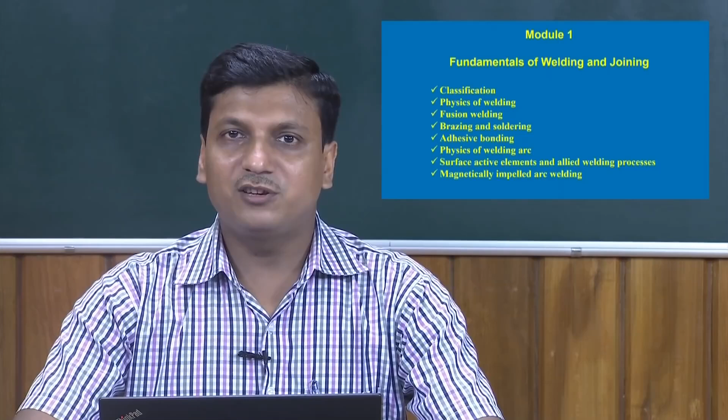Physics of welding arc, because so far much development has been done in the arc welding processes. So, we will try to get some idea about the physics involved in the formation of the arc, very specific to the welding processes. Then more advanced topics in this section, that is the influence of the surface active elements, and based on that what different welding processes have been developed, or how we can modify existing welding processes by considering the effect of the surface active elements. And finally, we will try to cover the magnetically impelled arc welding process.

So, these are the different sections of this module, and the name of this module has been given as fundamentals of welding and joining. We will try to get some idea of the basic physics involved in the welding processes, or most conventional welding processes, and the different technology of the welding processes. We will just get some broad idea about the processes.

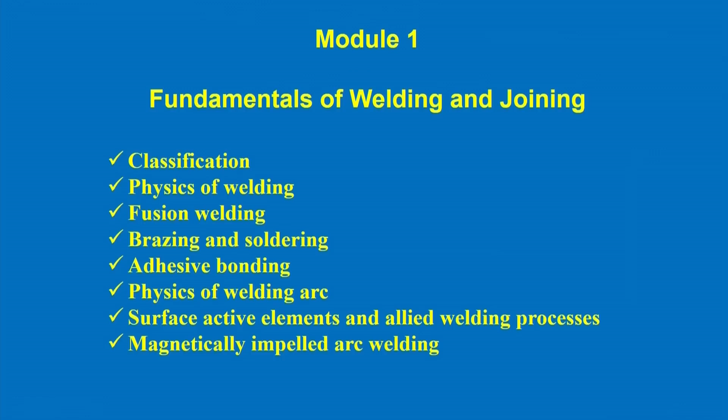If we see almost all sectors of industry, there is a need for joining of materials, which can be done either by fusing the metals or using some adhesives or some other joining techniques. If we list some of the application areas: electrification, automobile, airplane, water supply and distribution, electronics, radio and television, agricultural sector, computer, telephone, air conditioning, and of course almost all sectors. So, it is indeed very important to know about the fundamentals of the different welding processes.

Now, this technology is mostly used in the airplane or aerospace industry, highway, health technologies, spacecraft, and recently different welding processes have been developed looking into the application of high performance materials. So, it covers almost all sectors.

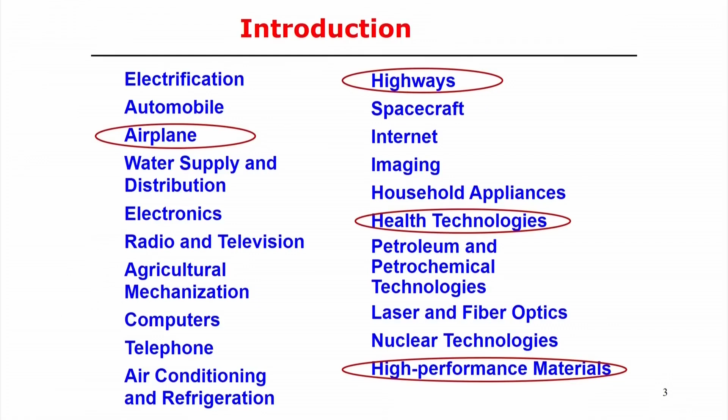So, here is the importance of the welding processes, and before going into much detail about all the welding processes, we will try to get the basic mechanism of all these processes. Probably it can be a review of the different welding processes; only their mechanisms will be the focus in this part. And now, how can we define welding and joining?

There is no precise definition of welding processes or joining processes, rather we can say that when two metals, specifically metallic materials, are joined by fusing with the application of different types of heat source, that in general is called the welding process.

Normally welding involves fusion, and joining processes may be of another kind. For example, when you use fasteners, mechanical riveting, and use the fastener to join the two components, that is also termed as a joining process, but there is no need of any kind of fusion or atom-to-atom covalence in that case. So, that can be considered as a joining process.

For example, even in adhesive bonding, if you use some glue to join two materials, that can also be called a joining process, but here the mechanism is different from the fusion processes. Where fusion is happening in welding and joining, that is specifically termed the fusion welding process. Of course, solid state welding processes can also be considered; we generally say solid state welding process, sometimes also solid state joining processes.

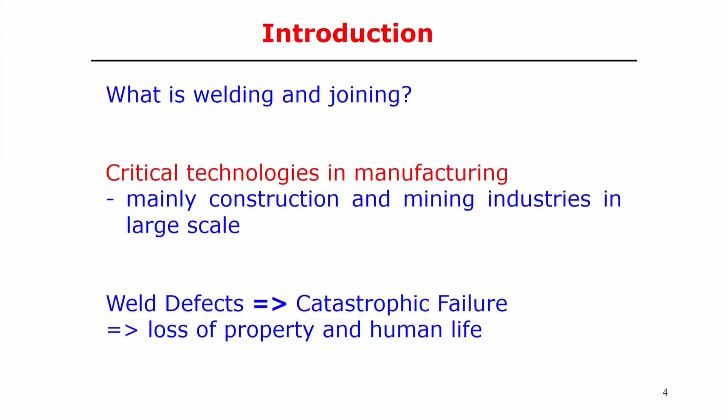Even soldering and brazing apply a third metal, trying to join the two different materials by fusing the third metal, but it is not necessary to melt the parent metal. That is the basic mechanism of soldering and brazing, so that also is one typical joining mechanism. So, in general it is not only welding or only joining; we can say it is welding and joining processes of materials, irrespective of metals or non-metals.

Now, critical technologies in manufacturing: the maximum application of welding and joining technologies we observe in the construction industry as well as the mining industry, where the thickness of the metal is very high. But at the same time, very precise applications of welding and joining are observed in health technologies and biomedical devices, where joining of very small thickness is required, sometimes less than 100 micrometers.

So, the application of welding and joining ranges from very precise instruments at the level of 100 micrometers or less, to the huge thickness or bulk joining of material in construction. Specifically, if you try to make a bridge, apart from the rivet joint, the welded joint can also be used, for example making a river bridge. In the mining industry also there is a huge application of large scale welding processes. So, from very large scale to very small scales, different welding and joining technologies are important.

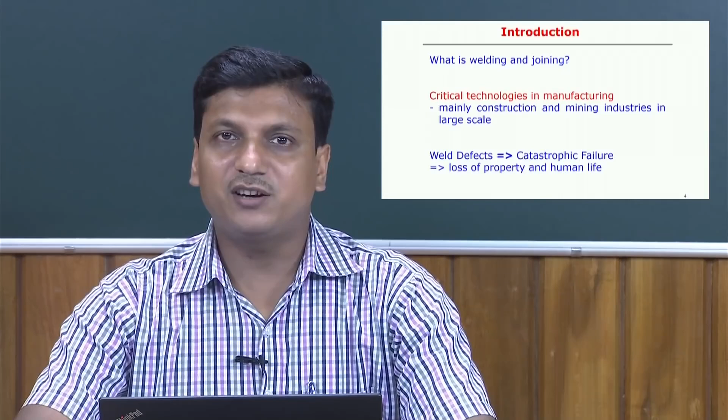So, always we try to target to reduce the nature of distortion and the nature of the residual stress. So, that is also another problem, or maybe I can say that that comes by inheritance, the presence of any kind of residual stress and defects during the welding processes. So, in that sense, it is also necessary to analyze or to know the basic mechanism or basic engineering of the different welding processes.

Now, before that, welding and joining processes can be classified in the following way, based on the different types of welding. Of course, the classification can be done from different perspectives. So, with respect to one perspective, you can say that there are three: fusion welding, pressure welding and friction welding. So, here basically the difference is the nature of the heat source and how we can control the heat source, or how heat can be generated to join two different or similar kinds of materials.

Fusion welding, definitely we apply the heat source in such a way that it should cross the melting point of the substrate material, so that it can fuse together, and after solidification it makes the structure. Pressure welding, simply application of pressure or application of load is the main mechanism to do the joining of the materials. Friction welding, of course, the heat is generated in this case due to friction. So, in friction welding, we generally keep the maximum temperature below the melting point temperature. So, in that case it can be considered as a solid state welding process as well.

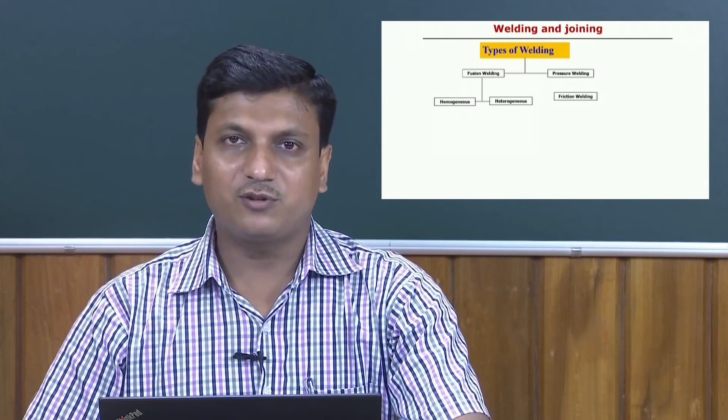So, these are three types of welding processes, and we can see further that fusion welding processes can be classified as homogeneous and heterogeneous welding processes. And the other part is the heterogeneous welding processes, that is brazing and soldering. Heterogeneous welding processes means that we use another second or third material to join similar kinds of material or two different types of material. So, in that sense it is called heterogeneous welding processes.

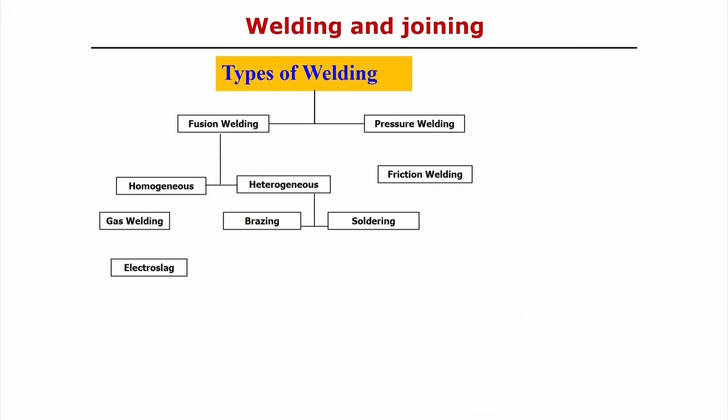In the other case, the homogeneous welding processes, here it may not be necessary to use a third material; two similar kinds of material can join and form a kind of homogeneous structure. Even dissimilar materials can join together, but finally they form a homogeneous structure. So, in that sense it is called homogeneous and heterogeneous joining processes. So, in homogeneous, there are several types of welding process: gas welding process, electroslag welding process, high beam energy and electric arc.

So, in all these cases the heat generation mechanisms are different, but the common thing is that when you try to join two materials, there must be some amount of heat generation, so that the materials can be joined together. But in all these cases the sources of heat are different. First case is gas welding, simply burning the gas, which converts chemical energy to heat energy, and that heat energy is utilized to weld the materials.

Then electroslag welding is also similar; in this case an arc can be generated. Then high beam energy, where beam means either laser or electron beam, a high source of energy can be used, and electric arc can also be used in this case. So, these are all the different types of homogeneous welding processes, but the heterogeneous welding process mechanisms are different from the homogeneous welding processes. In heterogeneous processes, conventionally we find two different types of welding process, one is brazing and another is soldering. So, in detail we will discuss all these processes.

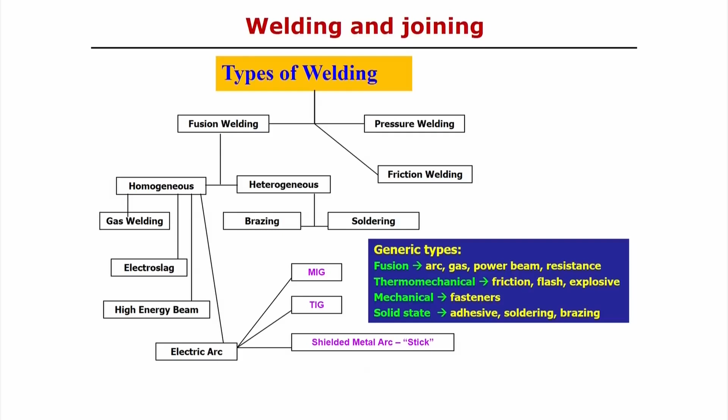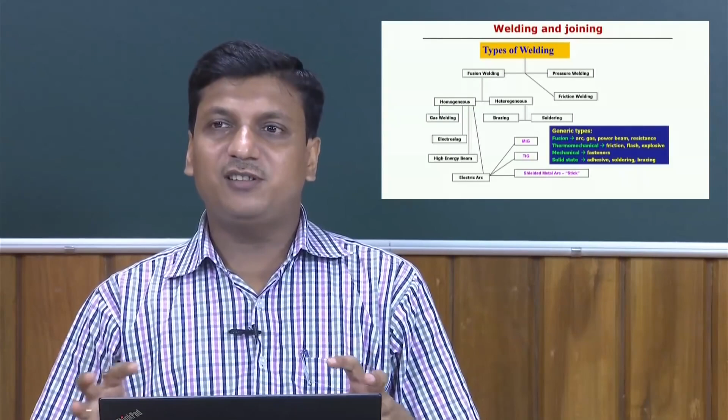Even for the friction stir welding process, the mechanical stirring action as well as frictional heat generation are responsible for the welding of the material. So, that can also be categorized as a solid state welding process. The point is that when you try to classify the different welding processes, we need to consider different perspectives. So, this is one way the different types of welding process normally exist.

If we see it from another perspective, we can classify the welding process. Before that, we look into the different types of welds we generally observe. In the first figure, you see that there are three types of welds. The first one is for hard surfacing, basically surface welding, meaning the application of heat and the joining or coalescence of the materials happens only over the surface.

Second one is the groove weld, making a groove between the two plates, and that groove is filled using some filler material. The primary use of groove welds is to complete the butt joint. In the butt joint configuration, two plates are flat and joined at the edge, either using filler material or not. In general that is called the butt joint, but it can also be considered a groove joint if we make some groove before welding these two metals. Another type of weld is the fillet weld.

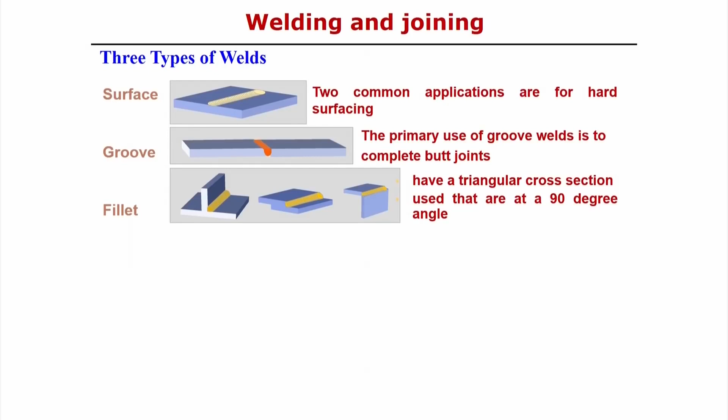In the fillet weld, the configuration of the geometry of the base metal is different. Although it makes a kind of T section, one side is filled by the welding material. That is called the fillet weld. It has a triangular cross section at a 90 degree angle. A fillet weld can be done over a T cross section, a lap joint, where two metals are joined and welded, or edge joints, where two edges at 90 degrees perpendicular can be joined using the fillet.

So, these are the types of welds, different welds, but the types of joints can be another way. We can observe the butt joint, simply joining of the two materials over the edge, and then the lap joint, where one plate is over the other plate, and either contact can be joined using filler material or without using filler material. That is called the lap joint. So, here the geometric configuration of the joint is different in this case.

Here if you see the T joint, one horizontal plate is there, over which a vertical plate is kept at 90 degrees, and then both sides can be joined or a single side can be joined. That is called the T type of joint. Corner joint: the two plates are kept perpendicular to each other, and that corner is joined using welding processes. And edge joint: the geometric configuration is different, but the weld can be done over the edge.

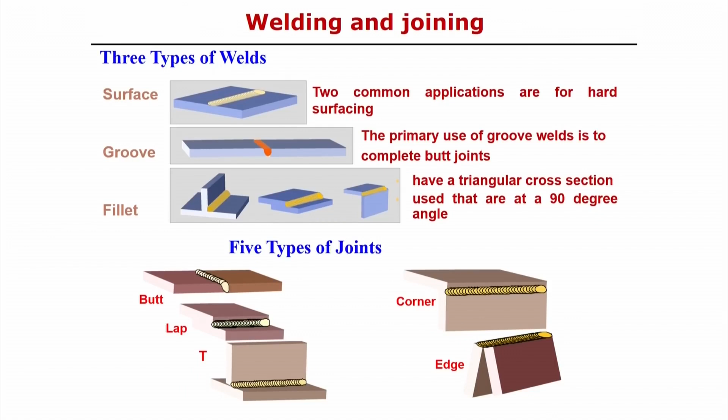So, from the figure it is obvious that there are different types of welds, and there are different types of joints we can observe practically, by the way we can configure the different materials, we can say different substrate materials. In that way we can find out the different nature of the weld joints we observe practically.

Now, again we come back to the classification of the welding and joining processes. In general we can say joining processes, and joining processes itself include the welding processes also. So, in the joining processes we can see one is the permanent joint, another is the non-permanent joint, and another is the semi-permanent joint. So, in that way we can categorize the different joining processes.

First is the permanent joint. A welded joint can be considered a permanent joint, because coalescence of the materials happens in this case. It may happen either in the liquid state, that means above the melting point temperature, or it can happen in the solid state as well. So, both can be considered permanent joints.

Second is soldering. When soldering is done, joining the two components, the solder material needs to melt and it can join the two materials, but it is not necessary to melt the parent metal. So, this also creates a permanent joint. A similar philosophy applies for brazing, and this is also called a permanent joint, and of course, the rivet joint.

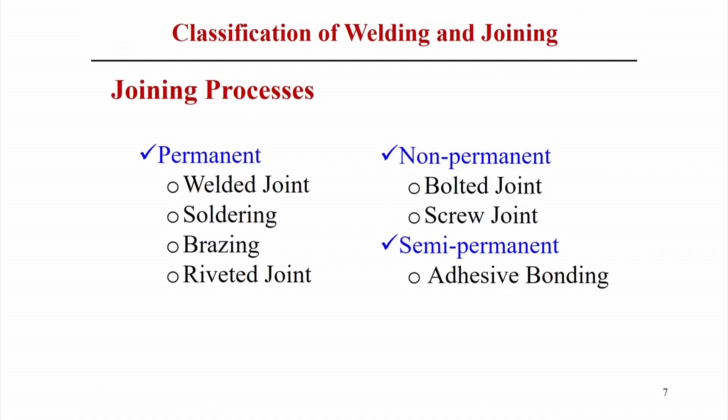The rivet joint is a kind of mechanical joint, but it can be considered a permanent joint. Non-permanent joints are the bolted joint and screw joint, because whenever required it is possible to disassemble the joined materials. So, in that sense they are considered non-permanent joints. But a rivet joint can be considered a permanent joint in the sense that if we want to disassemble the components, we need to break the rivet. That is why it is considered a permanent joint, but that is not necessary for the bolted joint or the screw joint.

Semi-permanent joint can be categorized as adhesive bonding, because when joining two materials, we put the adhesive between these two metals, and after a certain curing time, the two components or two metals are joined. So, that is the joint using adhesive bonding, but this adhesive bonding has some life; after a certain time they can be disassembled, but that depends on what type of adhesive we are using. So, in general adhesive bonding can be considered a semi-permanent joint.

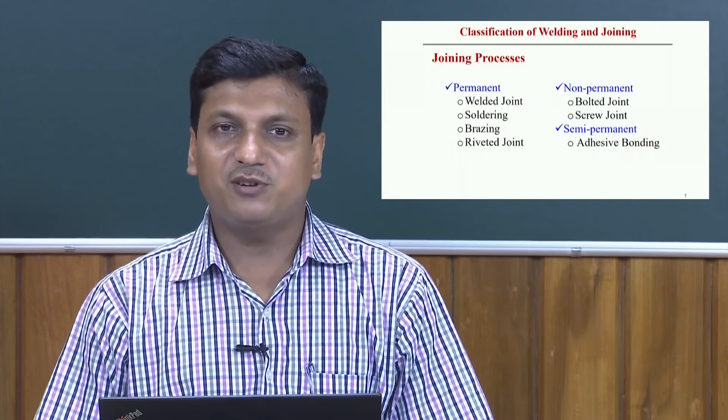So, the permanent, non-permanent or semi-permanent joint is one way of classifying the different joining processes. If we look at it another way, the welded joints, that is the classification of the welded joint. Several joining processes: fusion welding, then metal deposition process and pressure welding. These three main categories can be used when you try to classify the weld joint.

So, if we look into that, what are the different types of welding process included in the fusion welding process: gas welding, arc welding, high energy beam welding and thermit welding. So, in all these cases we apply the heat source intensity in such a way that it tries to melt the base material, and then after solidification the permanent joint can be done.

So, in this case, the nature of the heat source is applied in such a way that it will try to fuse the base material. So, that is why it comes under the category of fusion welding. In fusion welding, the source of the energy is by creating the arc, or chemical using the gas, or using high beam energy like laser and electron beam.

But in case of the metal deposition process, the sense of the classification is different. In this case, of course, we use a source of energy, and it tries to fuse the material, which is solder material, but it does not fuse the base material. So, in the metal deposition process we use another extra material to join the two metals without reaching the melting point of these two materials. So, soldering, brazing and adhesive bonding also come under this category. That means we use some extra material to join the two components without melting the parent components.

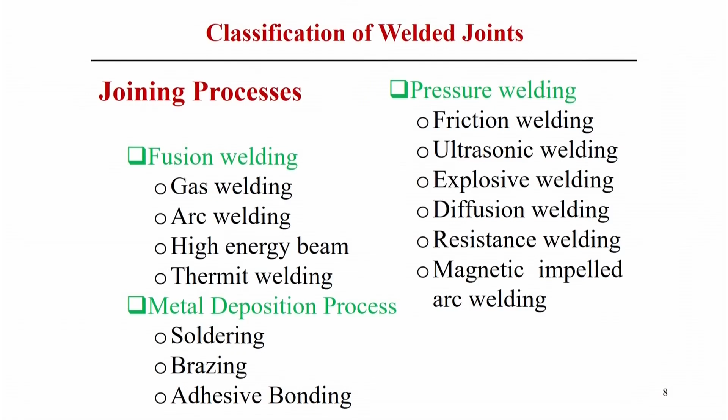Pressure welding is the other categorization. Here you can see the different welding processes included in pressure welding: friction welding, ultrasonic welding, explosive welding, diffusion welding, resistance welding and magnetic impelled arc welding. So, normally pressure welding means the application of load is required, which creates the joint or bonding between the two materials. In friction welding, apart from the pressure, some frictional heat is also generated, which helps the coalescence of the materials.

Similarly, ultrasonic energy can be used for joining. In explosive welding, we use some explosive and the components are highly deformed; a high rate of plastic deformation happens within the component, and then these two components can join in a solid state, so these are solid state welding processes also.

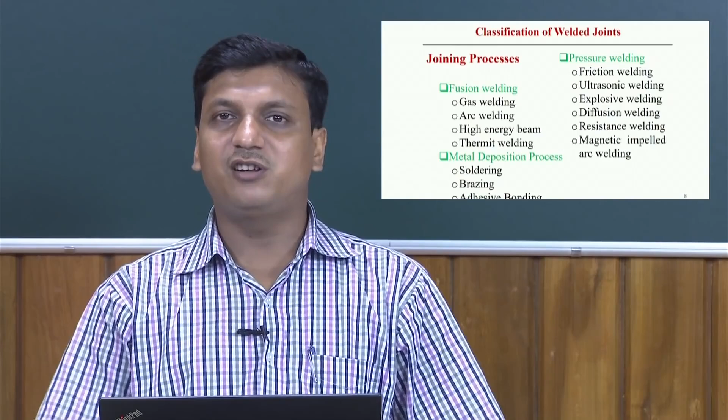Similarly, resistance welding. In this case we apply resistive heat, but at the same time, to make the joint we need to apply some mechanical load as well. Due to ohmic heating it generates the heat, but we also need to apply some constant or variable pressure so that the weld can be done. So, apart from the various sources of heat, some mechanical loading condition is also required in pressure welding. Anyway, we will discuss all the different types of welding processes individually.

So, having looked into the different ways of classifying welding processes, now we will focus on the physics of the welding process: how the joining of two materials comes about and how the welding industry has developed over time. So, the first question is: if it is possible to bring two metallic surfaces together, is it possible to join these two components? If that is possible, then all this development in welding processes may not be necessary, but let us look into that.

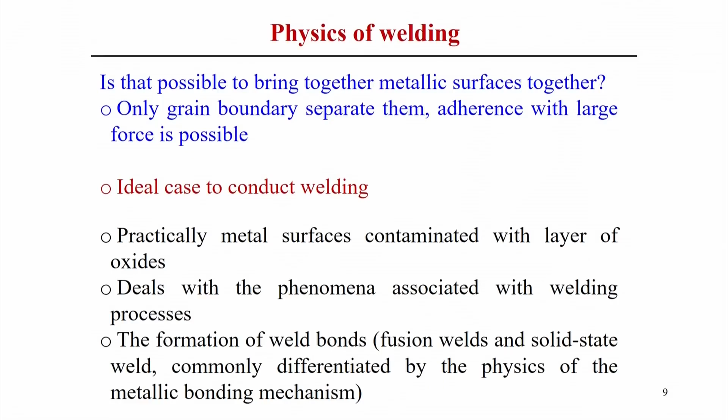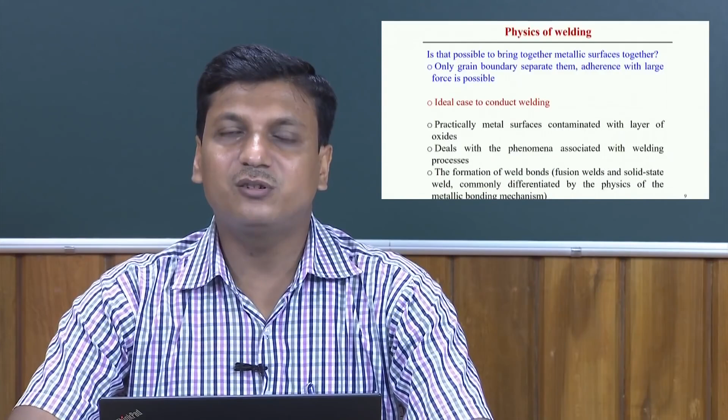Since only the grain boundary separates them, if two metallic surfaces come in contact, then joining with a large adherence force is possible. But this is the very ideal case, because that type of metallic surface may not be possible practically; in most cases metallic surfaces are contaminated with oxide layers. So, ideally it is not possible to